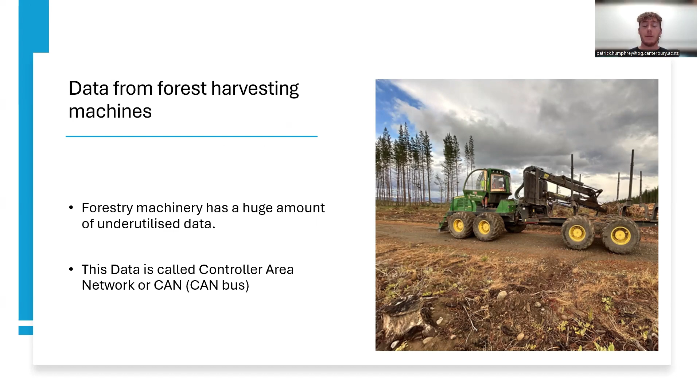So there's a lot of underutilized data that's within forestry machinery. And this comes in the form of controller area network, or CAN bus data. Now, what is controller area network? Well, essentially, it's a communication system used in cars, trucks, and machines that enables electronic controller units, or ECUs, to communicate with each other. For example, fuel delivery pressure systems, your accelerator, or your indicators.

It was developed by Bosch in 1986, so the technology has actually been around for quite a long time. And in simpler terms, CAN bus can be compared to the human nervous system. So an example I like to give is when you put your foot down on your accelerator, it sends a signal to other ECUs, for example, your fuel delivery pressure to tell it to go up, your RPMs to tell it to go up, so that you can achieve the acceleration in your car. So ECUs essentially control the functions in your car, truck, or machine, such as temperatures, steering, brakes, indicators, and so on.

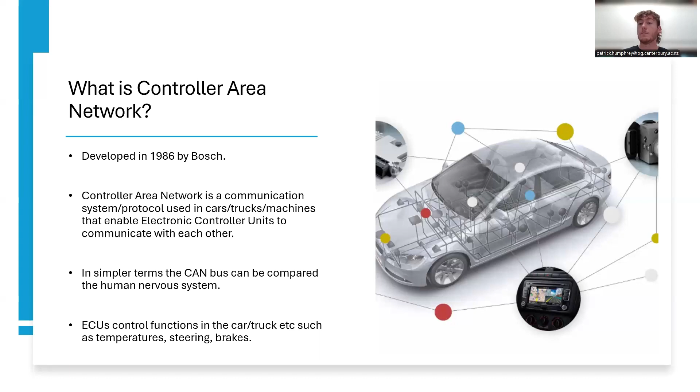So why do we use CAN bus data in our cars, trucks, and machines? Well, firstly, it's relatively simple and low cost. It's reduced compared to traditional point-to-point wiring, saving us about 20 kgs in weight, especially important for our cars. It's easy to access. So now that we've got a system that is like a nervous system that goes all throughout the car, it has a centralized diagnostic port, as you can see on the right here. The green plug is plugged into that port. And this allows us to see all the error codes and what's going on from a centralized location instead of having to go and manually pick out an individual wire.

And there's standardization across cars, machines and trucks. So we're under the ISO 11898 standard for CAN. It's extremely robust as well. It's not really affected by environmental noise, and it has extensive error detection. So we're not getting random spikes in RPM of say 8,000, which may have detrimental effects on our engines. It's also very efficient, so it's fast, thousands of CAN frames per second, which you're about to see.

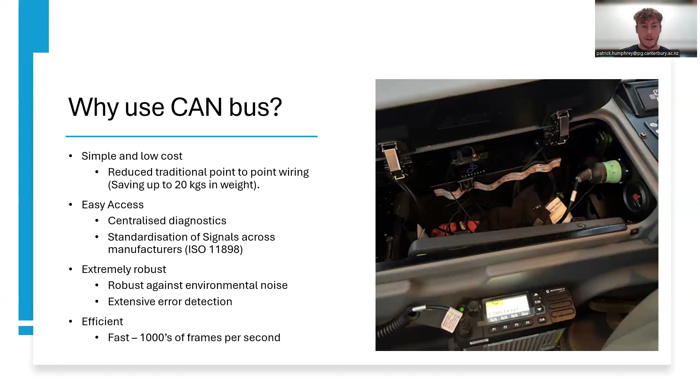And there are several standardized DBC files that we find out there. For cars, we have OBD2. For marine, we have NMEA 2000. And for heavy machinery as well as trucks, we have J1939. So most forest machinery should be using the J1939 protocol. And this is essentially the language or the format that the CAN frames and CAN data come in.

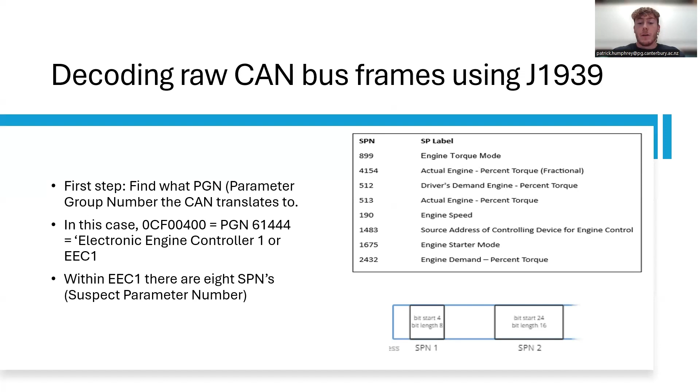And then within EEC1, there are 8 SPNs, or suspect parameter numbers. These are essentially the variables that contain the data. So the SPNs are within the data bytes. So for our EEC1, we have 8 SPNs. We have engine torque mode, actual engine percent torque, as well as engine speed and engine starter mode, among others. And as you can see there on the bottom, this is how a data byte works. Essentially, SPN 1 starts at bit 4 and has a bit length of 8. So engine torque mode data is found within there.

So yeah, as I said, we identify which SPN we want to decode. In this case, we're going to look at engine speed. And then we go back to the DBC file and figure out how exactly this can be decoded.

So for SPN 190, or our engine speed, we know our bit starts at 24. The length of our data is 2 bytes. It has a scale of 0.125, an offset of 0. Its unit is RPM. It has a min and max value, and there again we see our PGN. It also has a comment, so actual engine speed, which is calculated over a minimum crankshaft angle of 720 degrees divided by the number of cylinders.

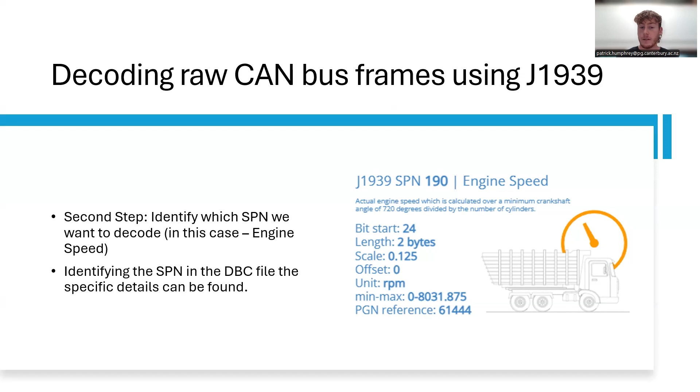So I know this slide looks confusing, but we'll step through it slowly. So again, you see our data bytes at the top: F6, FF, BE, 70, 2A, FF. We know through our little chart at the top left that we're looking at starting at bit 24. And if you go to the right there where it's in binary, you can see that bit 24 with a bit length of 2 bytes, we're after line 3 and line 4, which is 70 and 2A.

So CAN data uses Intel byte order. All that means is basically when we have that 702A, we just reverse it and it becomes 2A70. And so we know to get our engine speed, we go value equals 0.125 times 2A70 plus 0. So this 2A70 is in hexadecimal form. We have to convert that into decimal form before we can get our RPM.

So how we do that is we use 2 times 16 to the power of 3. A becomes 10, we times that by 16 to the power of 2, plus 7 times 16 to the power of 1, plus 0 times 16 to the power of 0. And ultimately, this gets us 10,864. So to get engine speed, again, we go 0.125 times 10,864 plus 0, which gives us an engine speed of 1,358 RPM. Cool.

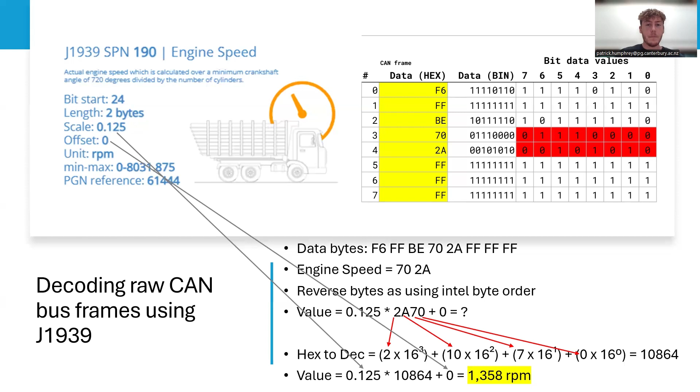So in practice, we don't do it manually like that. We automatically do it using Python scripts and a DBC file or a dictionary file of the J1939 codes. And essentially, we can convert thousands of these codes in a very, very short amount of time and produce the physical values in CSV files at intervals of either milliseconds or seconds.

So what sort of data are we getting out of these CAN systems from forest harvesting machinery? So we get some joystick movements and we also get button presses, but this changes depending on the machine. For example, the John Deere 959 felling machine gave us button presses, but the 1910E forwarder didn't give any button presses, but it gave all the joystick movements.

In general, we usually get engine speed, temperatures, pressures, torques, which are all pretty similar across machines, as well as hydraulic pressures and temperatures. Fuel consumption, fuel level, and fuel delivery pressure are again standard ones we see coming up across a range of machines. We also have a GPS unit that's tagged on to the data logger, which essentially grabs us the location, speeds, acceleration, and then some machines also have pitch and roll angles, like the 959, which are also included.

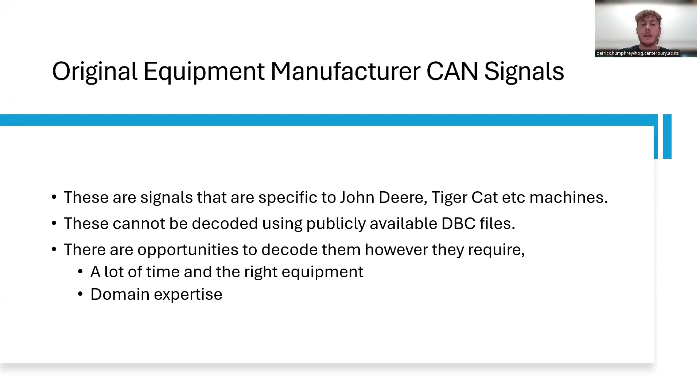We also have original equipment manufacturer signals or OEM signals, and these are signals that are specific to either John Deere, Tigercat, or the manufacturer of that machine. And these are signals that can't be decoded using the publicly available DBC files, for example, the J1939. There are opportunities to decode them. However, they do require a lot of time and the right equipment, as well as some domain expertise about what signals we're actually looking for. So in general, we tend to leave these signals alone, just because it's quite difficult to actually get anything good out of them.

So why we want to actually understand what the machine is doing at any given time is because it's difficult to relate your analysis to anything, say, for example, fuel consumed, when you don't know what the machine is actually doing. So when we know what the machine is doing, we can say, okay, the fuel consumption was this when the operator was loading, and it was this when he was unloading, and there's actually some comparableness there.

And machine learning gives us an opportunity to do this, and very accurately, using the CAN data that we're getting from these machines. So for example, the states of a forwarder would be idle, driving unloaded, loading, driving loaded, and unloading. And so we take a chunk of CAN data and we label it essentially one of those five things. So for example, if we see an engine speed of say 900, we'd label that data or that timestamp with an idle label.

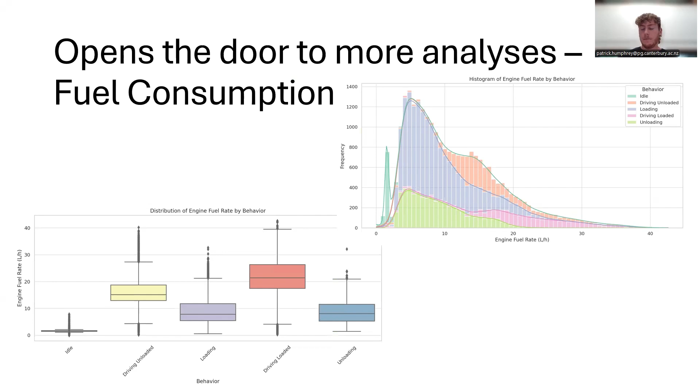And then we can look at this over a cycle, so this is taken from one cycle. So essentially on the left here, this is the amount of time spent at each behavior or each component of the cycle. So 45% of the time was spent loading in this cycle. But here on the right, we can see the proportion of total fuel used. So 45% of the time was spent loading, but it only accounts for 29.5% of the fuel use.

Whereas driving unloaded accounted for 21.2% of the time, but equated to 33% of the total fuel used. And on the right there, we can see to complete this cycle, it used 6.12 liters of fuel.

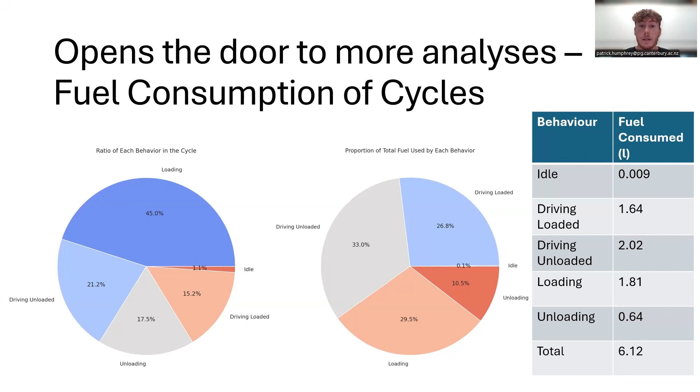Now we can look at different log grades. So on the left here, we can see our proportion of total fuel used for a K grade. And you can see here driving unloaded was at 33%, loading was at 29.5. But if we move over to the poles, we can see here that 60.8% of the fuel consumed came from the loading.

And this is because with loading poles, there's not that many out there in the cutover, so it takes a lot more time to complete this cycle, and therefore the time spent loading is actually a lot longer and makes the fuel consumption higher. So we can see for total in the K grade, we used 6.12 liters, but for the poles, we used approximately 4 liters more at 10.65.

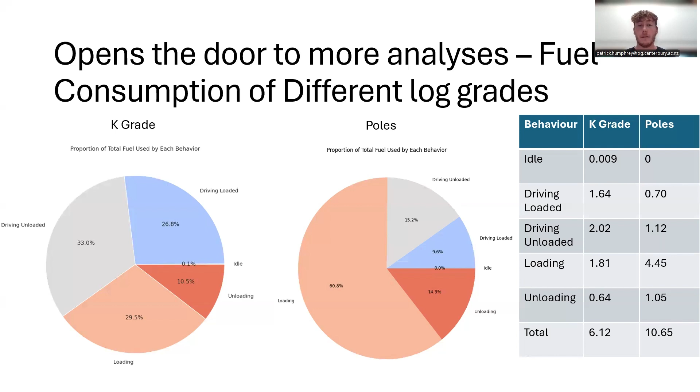Another analysis is looking at our operator movements, so identifying different loading grabs and their effects on productivity and potentially operator fatigue. So using video and CAN bus data, we identified several different types of grabs. So we have our normal grab, our pencil grab, and our slash drop grabs. So here's an example of a normal grab.

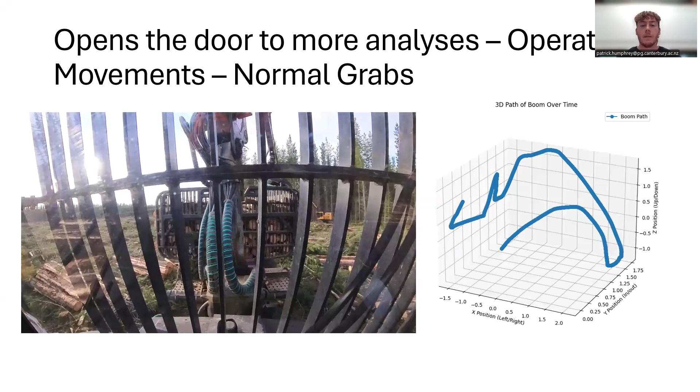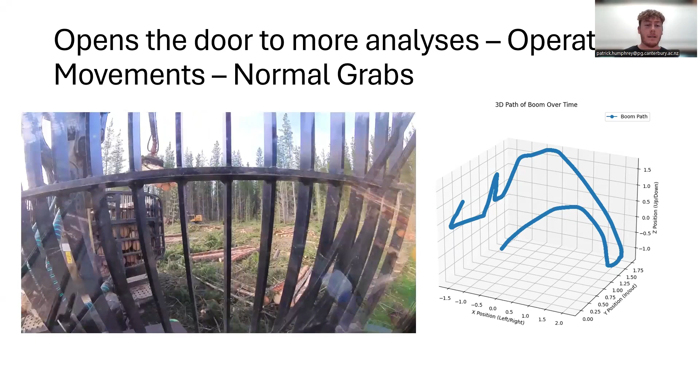And essentially there is no hindrance in this grab. He's just gone down, picked it up, not had to do anything, and dropped it right down in the bunk. As you can see on the right there, the pattern is very smooth.

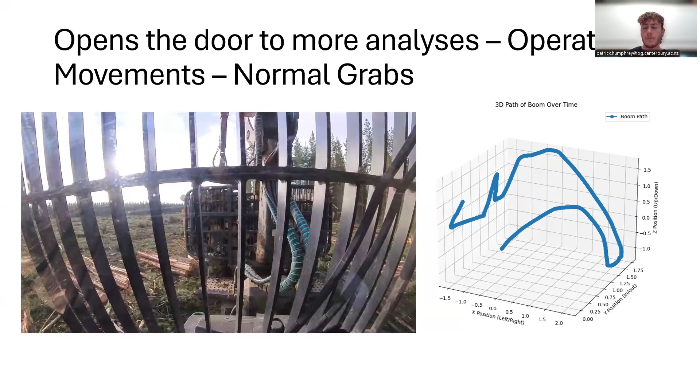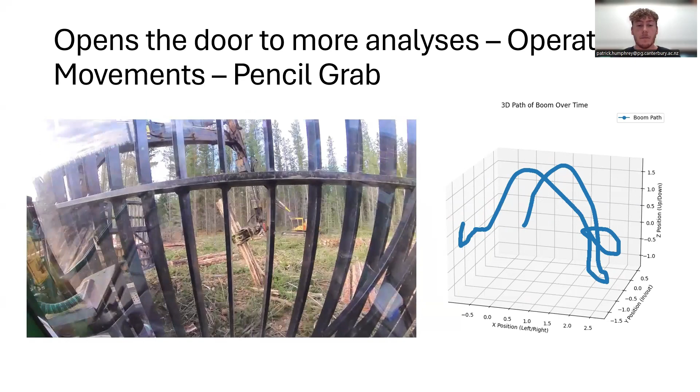A pencil grab is basically when the logs aren't butted up quite nicely, and he has to do this to ensure when he comes to unload it that the pile on the skid is nice. And you can see on the right there is a different movement path from the grab we saw before.

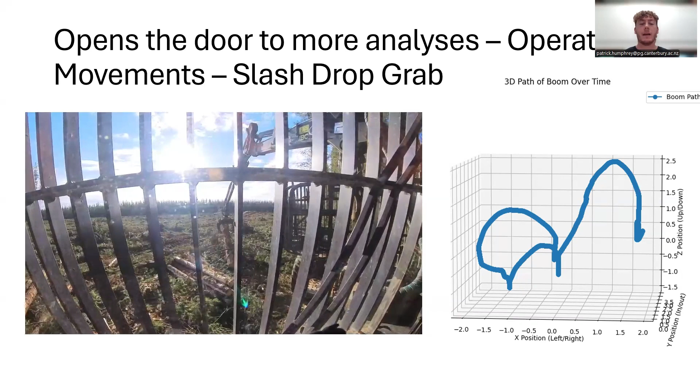And then finally, we have a slash drop grab. And this is essentially when there is a lot of slash surrounding the log pile or the log. And essentially, he's had to pick the log up and drop it down again to remove some of that slash so it doesn't end up in the bunk. You can also see a lot of opening and closing of the grapple during that as well to get that last little bit of slash out.

And so if we turn this into actual number of inputs or changes in the joystick movements, we can see that for a normal grab, we're only using about 2,421 different joystick inputs. For the pencil, we're looking at 2,673. For the slash drop, 2,744. So we can see basically there's a difference of 323 movements between the normal grab and the slash drop, and a difference of 252 between a normal grab and a pencil grab.

So essentially, when the conditions of the piles aren't perfect, the operator is actually having to make a lot more movements and a lot more actual inputs to actually pick these up, which essentially could result in extra fatigue during the end of the day.

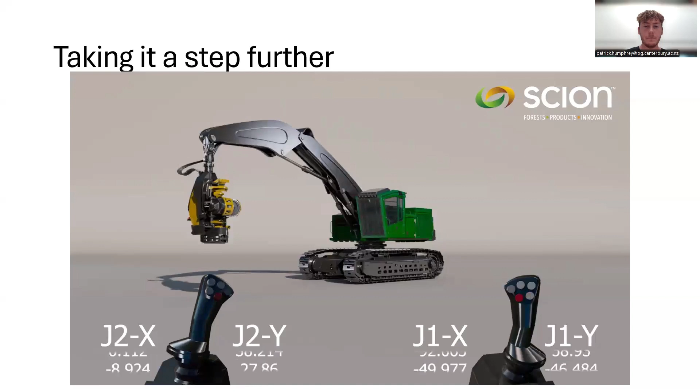So there is potential to use this sort of technology to help train early career operators and help them to get that extra boost in productivity earlier on than your typical learning curve, with overlays potentially in simulators of an actual good operator working in a real environment.

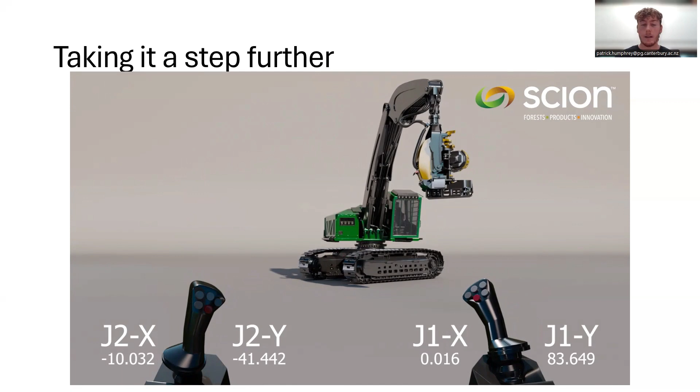So basically, we can compile all of this work together in a centralized location. So I introduced a system that captures, automatically processes, automatically analyzes, and displays all of this CAN data I talked about before into an online dashboard. And this dashboard can be accessed by the operator, by the contractor, by the owner of the forest, or the owner of the crew, to see what's going on with each one of his or her machines.

So for example, it can monitor operations. So how many trees has the felling machine cut? How many have been processed? What is actually on the skid, say at 2:50 in the afternoon? How many have been loaded on that day? What types of logs have been loaded on? And then the second key thing here is it can help improve performance through review. So especially for those early on operators, how many movements they're making for each grab or each cycle, where some improvements can be made, etc.

So looking into the future, there's definitely some opportunities to include some of the CAN bus analyses and that dashboard into real life operations, especially for improving the wood flow to skid management and actually understanding what we've got on the skid at any given time. But where we see a real benefit is this sort of system needs to be integrated into the entire harvesting operation. It doesn't work so well when it is just, say, the harvesting machine that has it, or just the forwarder. All parts of the harvesting supply chain or the harvesting operation need it.